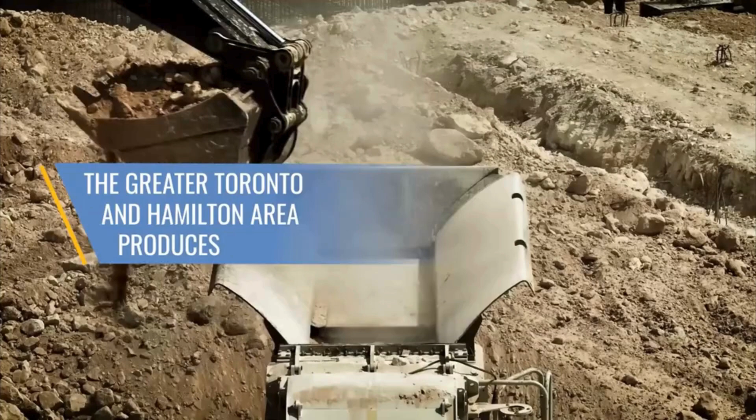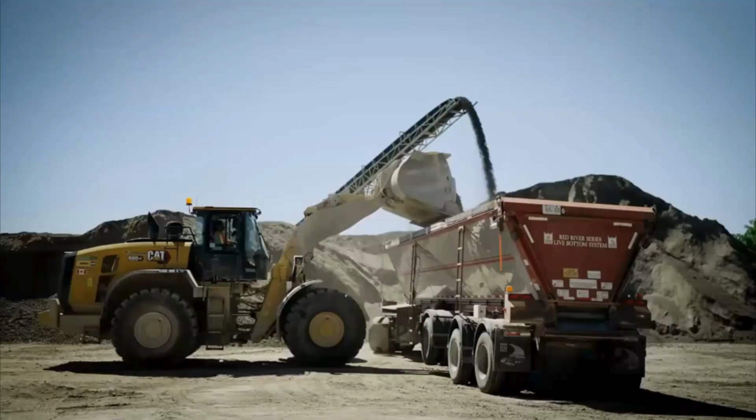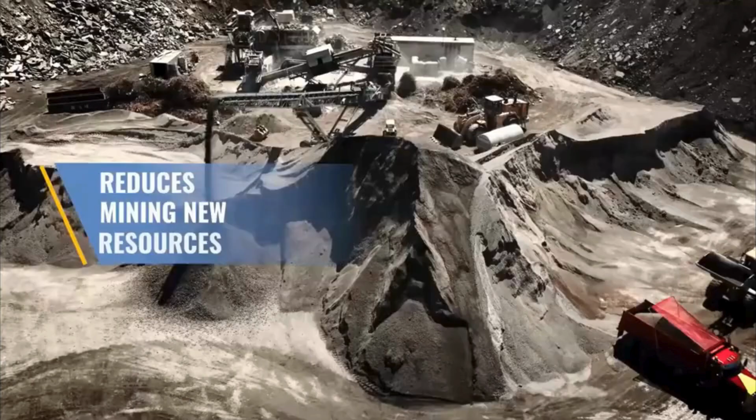Today's roads define tomorrow. For our communities to thrive, we need to build the infrastructure to support them. But as our cities grow, so does our impact on the environment. Every day brings us closer to exhausting our aggregate supply, the essential construction materials for the housing, transit, schools, and hospitals we rely on. The further we need to travel for or ship these materials, the more expensive it is to build, and the greater the environmental impact. But there is an alternative, a cost-effective, sustainable way. As we replace old roads and sidewalks, we can take the rubble to local recycling plants, where it is crushed, cleaned, and sorted to a standard provincial requirement, and repurposed to build new roads, subdivisions, highways, bridges, and tunnels. The same safe, engineered roads for our families to travel on, built sustainably with our children's future in mind. Every kilometer that uses recycled aggregates reduces the need to mine new resources, keeps valuable construction materials out of landfills, reduces carbon emissions and pollution, limits traffic congestion, and reduces the financial strain on municipal budgets. Countries around the globe, Toronto Pearson Airport, and our 400 series highways here at home have all used recycled aggregates in their expansion and new construction, demonstrating the durability, safety, and high performance of recycled crushed aggregates. And now, we're urging Ontario municipalities to adopt sustainable building practices and prioritize the use of recycled materials. With a recycling rate of just 20%, municipalities can make a positive change. This is clean air, less waste, and a future where growth doesn't come at the cost of our planet. The roads we take define us. Let's build a greener future we can all be proud of.

So with that, I'm going to dive a little bit more into the context here.

I think many of you might be aware that we are looking at continued population growth in Ontario and a growing state of good repair backlog, both of which require us to build more and maintain our existing transportation and housing infrastructure. We've also seen construction costs rise, especially during and after the pandemic, and as we deplete close to market sources of aggregates, those costs will only rise.

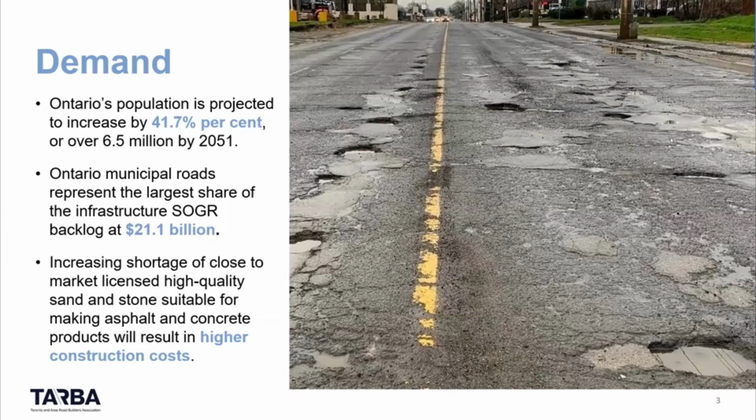And as roads are repaired, bridges are maintained, and other critical infrastructure is replaced or expanded, tens of millions of tons of asphalt and concrete are removed from construction sites across Ontario. And if they're not recycled and reused, these valuable materials will end up in landfills, further exacerbating our landfill capacity.

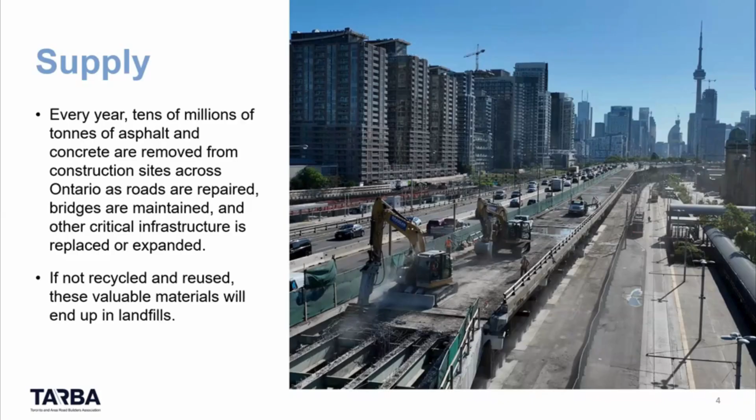So to start off with some definitions, and to dive into our discussion today, as you saw from the video, and as many of you probably know, asphalt and concrete are 100% recyclable and can be reused as valuable construction materials. So I do want to clarify, because we get this question a lot, as to what we mean by recycled crushed aggregates. So we have RAP, which is reclaimed asphalt pavement. We have RCM, which is the reclaimed concrete material. And the main topic of today, recycled crushed aggregates, is reclaimed asphalt pavement and/or concrete.

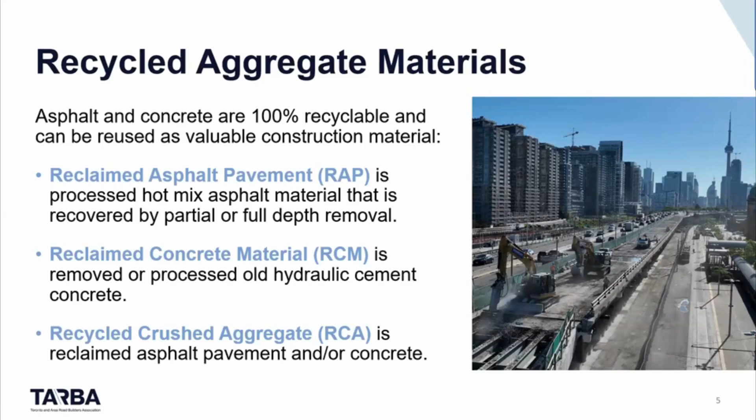In our view, RCA is a sustainable product that offers some of the greatest environmental benefits at a low cost. These materials have already met performance specifications when they were originally used, and when reclaimed, they undergo an additional rigorous process of crushing, screening, testing, and quality control to be repurposed for their intended application as construction material in new projects. Extensive testing in Ontario and internationally has shown that RCA is a high-performance material for an increasing number of applications, with numerous studies concluding that its geotechnical properties are equal and sometimes superior to primary aggregates.

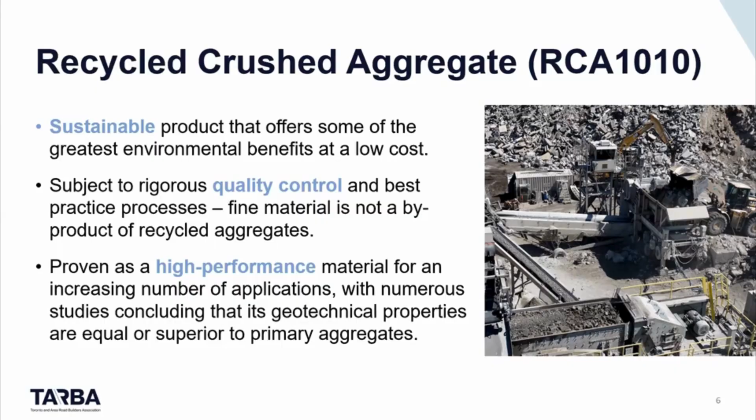And I look forward to Salman walking us through some of those results later today. In fact, when RCA conforms to Ontario specifications, or OPSS 1010, project owners can be confident that these materials will meet all performance requirements and quality expectations. As most of you know, the OPSS 1010 is administered jointly by the Ontario Ministry of Transportation and the Municipal Engineers Association, and also includes representatives from the construction industry.

So the spec as it is right now allows aggregate use in road bases, shoulders, and backfill to be composed of up to 100% recycled concrete and up to 30% recycled asphalt. And hot mix asphalt can also contain up to 30% RAP.

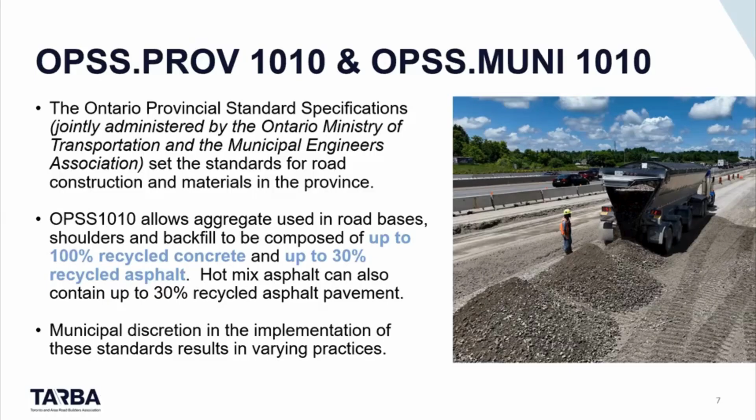However, despite this provincial standard, municipalities have discretion in their implementation and they can set their own standards. As a result, practices can vary widely by municipality, even in an economically significant region like the Greater Toronto Area, which is made up of 25 urban, suburban, and rural municipalities. For example, municipalities have specifications requiring primary aggregate only as part of their local specs or tenders,

So here's a good cheat sheet or an overview of the important direct and indirect economic and environmental benefits of using RCA. It significantly lowers carbon emissions, pollution, and project costs associated with long-haul trucking of the material while performing equally or better than primary aggregates. The shorter distance traveled also means less traffic congestion and wear and tear on roads, and RCA also preserves non-renewable resources and extends the life of existing pits and quarries. And how does it do all of that?

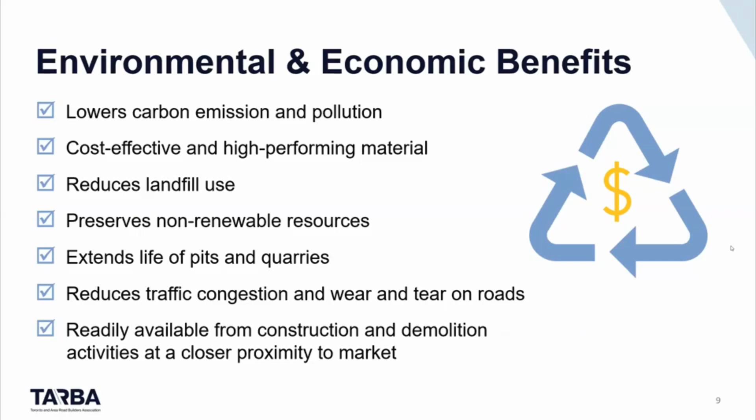So looking to the next slide, transportation makes up to 60% of the cost of aggregates. So that means that every extra kilometer that aggregate has to be trucked to a job site, it increases the overall building costs and carbon emissions. And RCA is available at a fraction of the distance to the new construction sites.

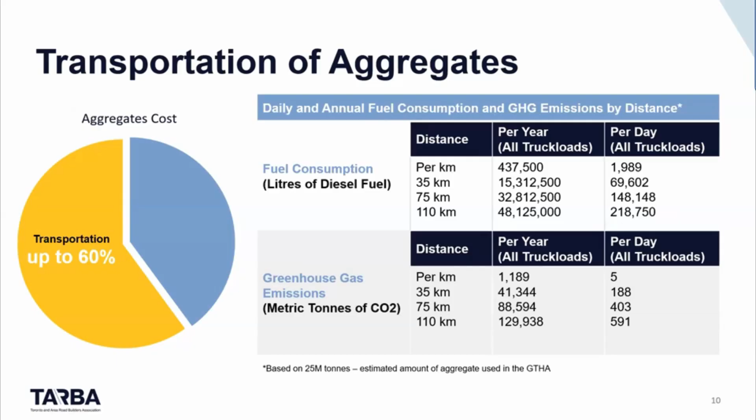The chart to the right, provided from research from EXP, estimates the fuel consumption and associated greenhouse gas emissions for the 25 million tons of aggregate produced in the GTA. As expected, longer distances traveled require more fuel and emit significantly more GHG emissions.

Now, as part of that research, 4 projects were examined, from a parking lot to a big box store distribution center in the Greater Toronto Area. The research found that the higher amount of RCA used on a project, the bigger the cost savings and carbon reductions. On average, across the 4 projects, the savings were about $8 per ton, and the carbon emission reductions between the primary and recycled aggregates were predominantly derived from the shorter distance traveled.

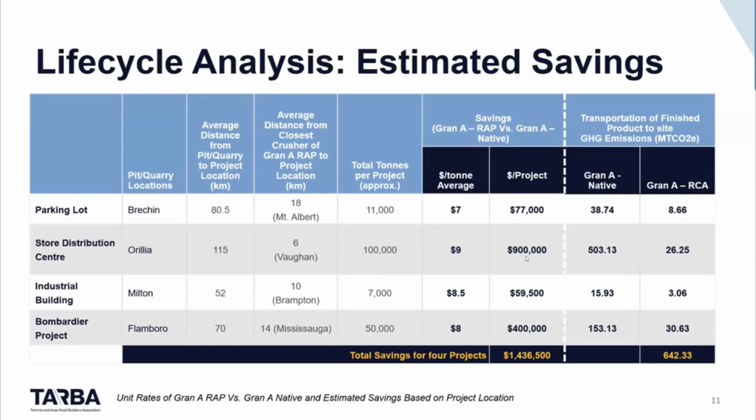So you'll see here on the chart, we have 18 kilometers versus 80, 6 versus 115, 10 versus 52, and 14 versus 70. And you'll see that the more aggregate that is used on a project, the higher the savings. So for 11,000 tons, you have 77,000 in savings versus 100,000 tons, which is almost $1 million in cost savings.

Next, I want to share with you 4 examples of RCA use in Ontario. The first is the Ontario Ministry of Transportation, who has used RCA in the expansion and maintenance of its extensive 400 series highway network dating back to the 1970s. On this particular expansion of a 9-kilometer highway stretch, MTO used 300,000 tons of RCA, generating $1.2 million in cost savings for taxpayers. The RCA source was less than 10 kilometers to the project, generating significant carbon reduction emissions.

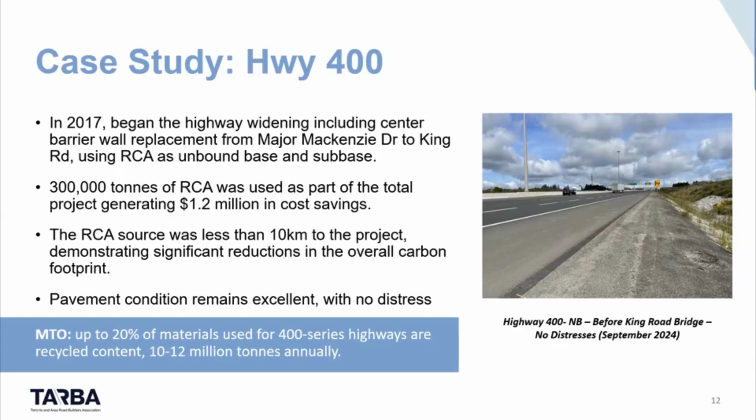Second to that, and on our topic of performance, back in 2006, Toronto Pearson Airport set the example for material reuse, recycling, and remediation with the demolition of Old Terminal 1, which at that time was Canada's largest demolition contract. 250,000 tons of rubble was crushed, screened, and recycled on site to be used as the apron subbase holding up the final apron structure. Since the process took place on site, it significantly reduced carbon emissions from long-haul trucking. In 2022, Pearson reused another 25,000 tons for the rehabilitation of its second busiest runway, once again showing no structural failures or additional maintenance requirements.

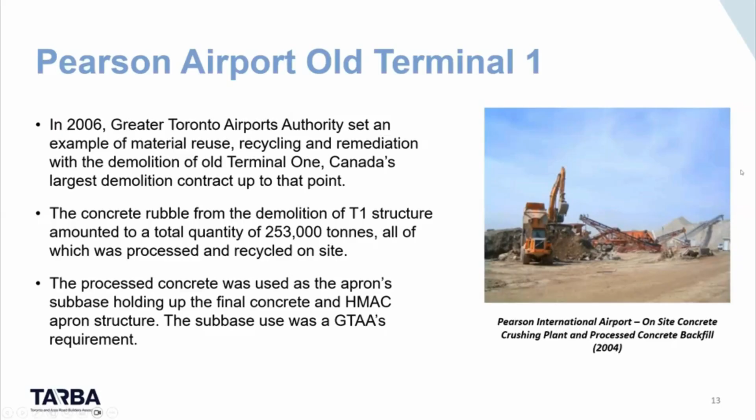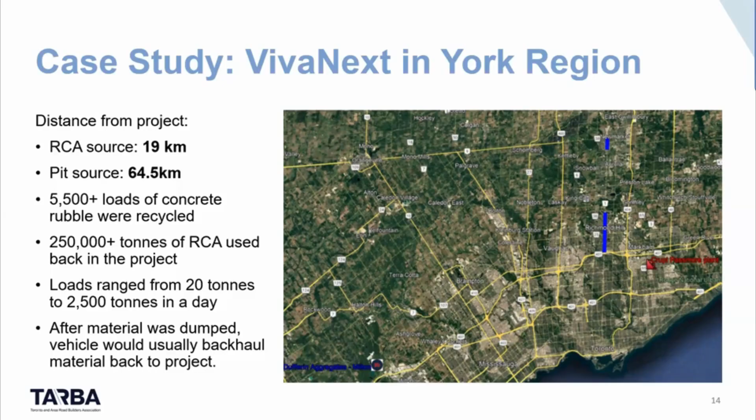So an additional benefit I'd like to highlight here is that after the rubble was dumped, the vehicle would backhaul material back to the project, minimizing empty loads as part of the project operations.

Six years later, after many good Canadian winters, York Region is very happy with the performance, reporting no structural issues or additional maintenance required. You can watch that full webinar on our YouTube at Road Builders.

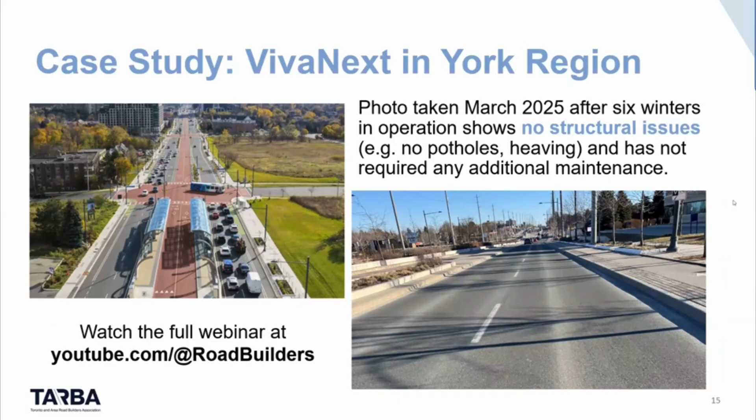The last project I want to share is one from East Gwillimbury, north of Toronto, with a population of just over 35,000 people. Through its Thinking Green standard, it requires 30% of recycled materials to be used. In 2021, their Queensville subdivision used approximately 88% recycled material, generating $152,000 in savings for the project. I included this example because it's a small municipality, showing that these can still tap into the benefits through thoughtful policy direction and by using the OPSS guidelines.

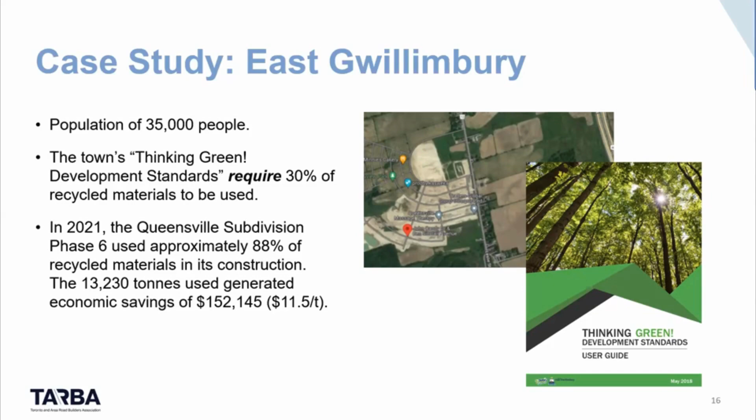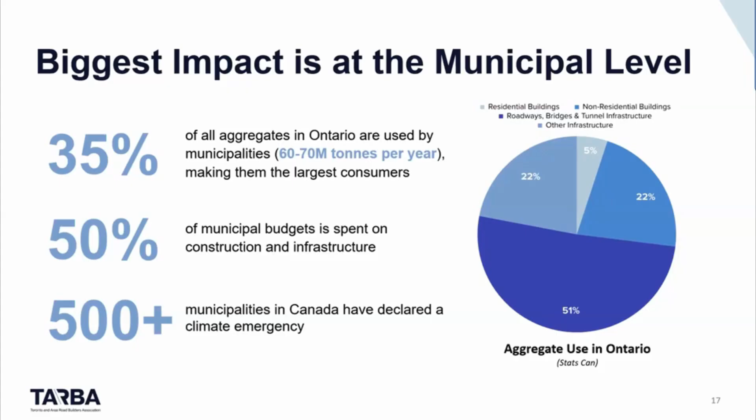You saw that the video largely focuses on municipalities. So why municipalities? The short answer is that's where the biggest impact for RCA's economic and environmental savings can be seen. In Ontario, just over 50% of all aggregates are used in the construction of roadways, bridges, and tunnel infrastructure, and all of those can be built with RCA. Municipalities own and manage more roads than the provincial and federal governments combined, and they are the largest consumer of aggregates, using 60 to 70 million tons per year, with 50% of their budgets allocated to construction and infrastructure. All of this in the context that more than 500 municipalities in Canada have declared a climate emergency, and even more have net zero targets they're hoping to accomplish.

From a municipal and provincial perspective, RCA is also the solution to two big land use issues at the local level: reducing construction waste in our landfills and extending the life of existing pits and quarries. If you live in a municipality close to one of those, or work in policy development, you've seen that it generates a lot of resistance and is quite a contentious issue for local communities.

Ontario has less than 10 years until all landfills in the province are full, according to a live countdown run by Waste to Resource Ontario. At the same time, aggregates are the foundational material for the critical infrastructure our growing communities need. Even in a resource-rich area like the Greater Toronto Area, we already have an aggregate deficit. The region produces 25 million tons but consumes 73 million tons, projected to rise to 1.5 billion by 2041, all while exhausting close-to-market sources. As I mentioned, the further we need to travel for our aggregates, the higher the cost of construction and our impact on the environment.

Sharing the top line stats you saw in the video: if municipalities across Ontario adopted a recycling rate of just 20%, it would avoid extracting up to 33 million tons of new aggregate per year across the province. This would result in annual savings of 264 million dollars and greenhouse gas emissions equivalent to taking 15 million gas cars off the road for an entire year. In case you're wondering, that's a lot more than all the cars we have here in Ontario.

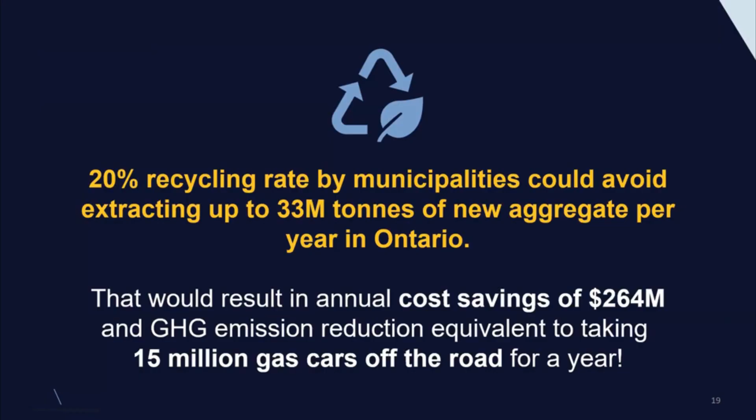20% was selected as an achievable target, demonstrated for decades by the Ontario Ministry of Transportation, proving the cost and sustainability benefits while maintaining performance. As you'll see throughout the remainder of this presentation, the key aspect in using RCA successfully is quality control, as with any other material. As mentioned at the beginning, research has shown that when RCA conforms to OPSS 1010, project owners and contractors can be confident that these materials will meet all performance requirements and quality expectations.

This is why we very strongly encourage that all efforts should be directed to enforcing quality rather than restricting the use of the material. On the website rcaontario.ca, you'll find the TARBA quality control plan, which provides a technically sound manual for the production, utilization, and ensuring the quality of recycled crushed aggregates. This can be used as a great resource for producers, contractors, and project owners.

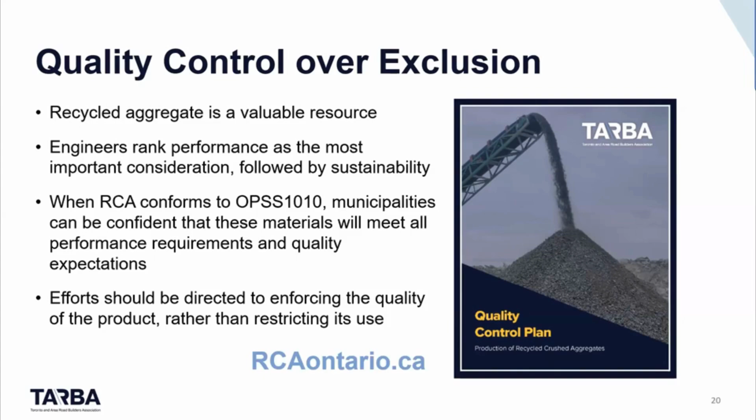The last slide I'll leave you with, before I hand it over to Salman, is that in our view, both public and private project owners can unlock the benefits of RCA by prioritizing sustainability as part of the initial project design. More specifically and tangibly, as action items, the first and foremost would be including RCA use as part of the tenders. In some cases, we've seen that even if a municipality has specifications that allow the use of RCA, once tenders come out, they still specify primary aggregates only.

So it's really important to include RCA use as part of the tenders in order to be able to tap into those project cost savings as part of the initial bids.

Align municipal standards with the OPSS 1010. Having a smorgasbord of different standards, municipality to municipality, actually erodes the consistency and performance. It increases administrative burden and discourages wider adoption. So aligning those municipal standards and capitalizing on economies of scale as part of the production of the material will only benefit project owners, contractors, and suppliers.

And lastly, collaborate with industry. The projects that I've shared have been great public-private partnerships with the builders, and that's really to tap into the internal capacity and confidence of quality control measures and ensure that the applications are appropriate.

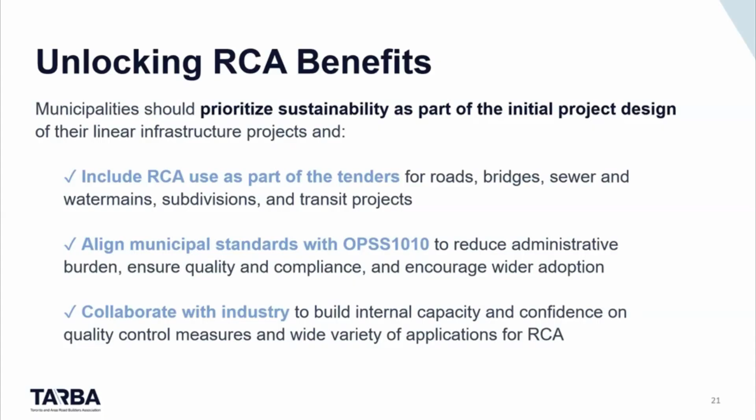and the material is used to its greatest abilities. On the same website that I mentioned already, rcaontario.ca, you'll find additional resources, including the EXP research, the research by Engtec that Salman is going to talk to shortly, as well as the VivaNext case study and other webinar presentations on the topic.

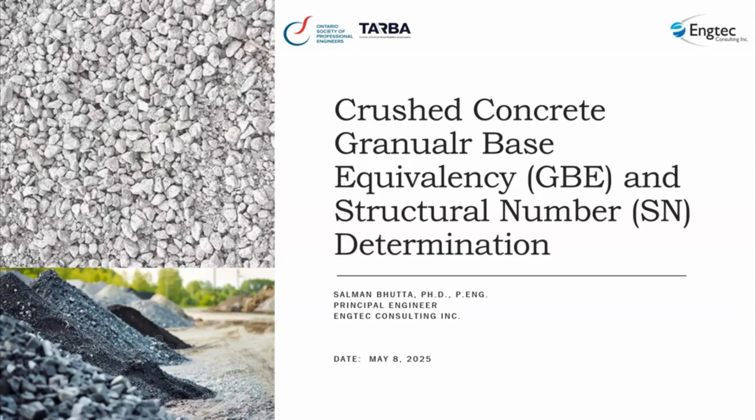This is a bit of a technical background to it. I'm going to talk about some numbers, but in the end it's all going to gel into one formal conclusion, which will give answers to the questions in our mind: Is crushed concrete good or is crushed concrete bad? Is it structurally sound or is it structurally not sound?

With that in mind, I took the liberty of setting up this presentation where I'm going to talk about the background as to why we are doing this. We're going to talk about assessing the granular base equivalency and structural number of crushed concrete - how did we assess it, how did we test it. We're going to compare it with materials which we deal with as a standard in the industry: virgin granular A's, granular B type 1s and type 2s, and crusher run limestone type material, which we are very familiar with. Then I'm going to wrap it up with conclusions and recommendations as to what we found out of this study and how we can utilize it in pavement designs and replacement of one material with the other.

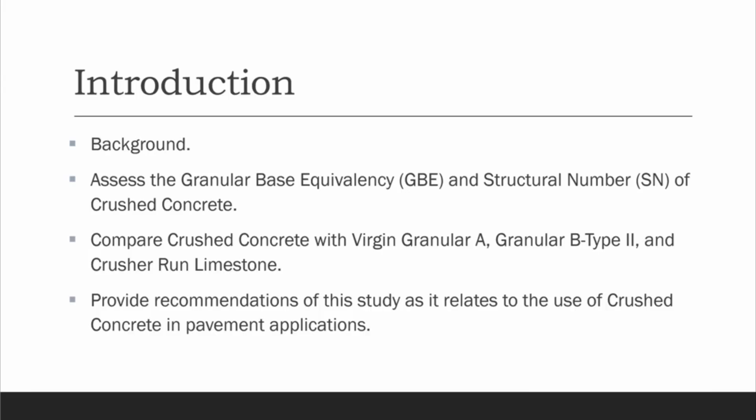So just to go through a background, the use of recycled materials, namely crushed concrete, is gaining quite a bit of momentum in the industry. About 20 to 25 years ago, in the early 2000s, it was a question mark element, but now it is widely used in municipal, private, and provincial projects all the time. Recycled materials reduce the demand for virgin aggregates, minimize waste, and contribute to sustainable construction practices.

However, a critical aspect of this adoption is the need to ensure that the structural integrity and performance of the materials, namely crushed concrete, is comparable to traditional materials like virgin granular materials, crushed limestone, or sand and gravel materials, which we've been using forever in the industry and have a long history. Keep in mind, crushed concrete has over 25 years of history also at this point from a technical perspective.

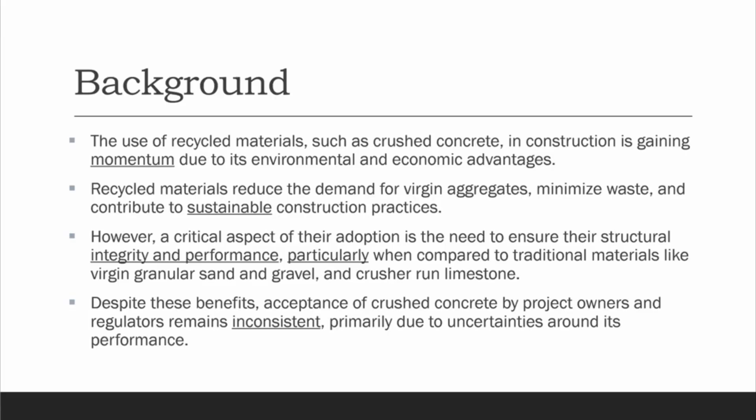Despite these benefits, acceptance of crushed concrete by project owners still remains inconsistent. You see a lot of times projects allow you to use it, but then when it comes down to proposals implementing it, the product is refused. I've been involved with projects where it was refused. There are certain uncertainties around its performance - some of them are true, some are not. Some are based upon earlier crushed concretes from the early 2000s, which had bits of issues here and there, but things have improved significantly since then. This study offers a thorough evaluation of structural numbers.

Those of us who design pavements are aware of structural numbers and how we calculate them. Granular base equivalency is a concept from the 1990s and earlier, comparing crushed concrete performance to standard materials, which is virgin materials for that matter.

What TARBA has noted is inconsistencies in how the structural strength of crushed concrete has been assessed over the past two decades. In some regions, crushed concrete layer thicknesses are arbitrarily increased 10 to 15% thicker. Say if you're going to put 150 millimeters of granular A virgin, if you want to use crushed concrete, we need 15% or 20% more, whatever the criteria. So it's a very randomized selection of acceptance of this material, as opposed to crusher run limestone or 50 millimeter crusher run limestone for that matter.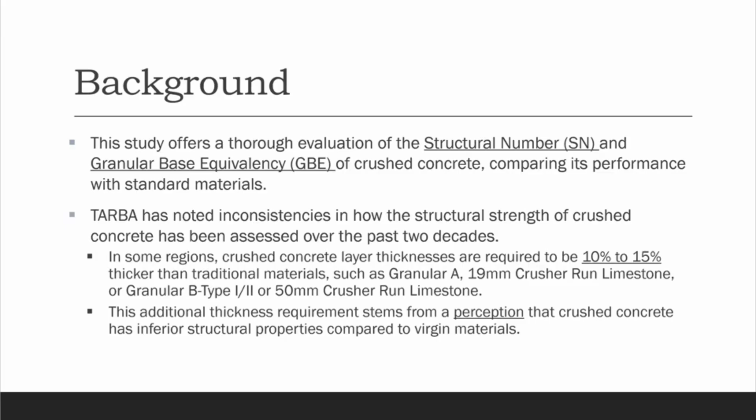This additional thickness requirement stems from a perception that crushed concrete is an inferior product, and consequently it is not comparable to virgin materials. So hence this study, to try to figure out: is it structurally inferior or not?

This study seeks to challenge that perception and provide data that supports the equivalency of these materials. The tests are intended to demonstrate that crushed concrete can perform as well as traditional materials without the need for any increased thicknesses, and we will discuss some testing here also.

How to go about getting them approved. Furthermore, this is recognized by the Ministry of Transportation Ontario, because in most of their projects they consider it an equivalent, although MTO has a granular B type 1 equivalency. They do not allow it to be used as a granular B type 2 material, and that's something we'll discuss toward the end, mostly based on early 2000s assessments that were done, and the materials in those days were a little bit different in terms of quality also.

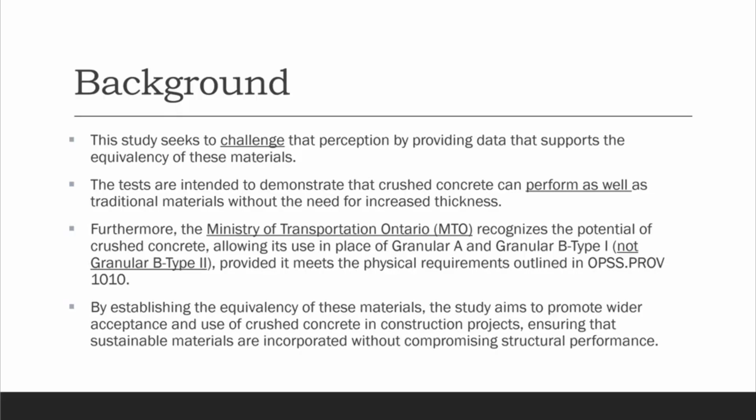By establishing the equivalency of these materials, this study aims to promote wider acceptance and use of crushed concrete in construction projects. The main objective is to ensure that sustainable materials are incorporated, as Raleigh indicated, without compromising structural performance of pavements and linear infrastructure.

So now I'm going to jump into that study. Last year we were in conversation with Tarba, and they required some complex testing to prove this. Essentially we're talking resilient modulus type tests, which are not very common and mostly done by university type entities. We are lucky at Engtec that we have the infrastructure, equipment, and expertise to do those tests.

So we set up a program whereby we picked three different types of crushed concrete supplier samples: 19 millimeter crushed concrete and 50 millimeter crushed concrete. There are suppliers, but I just call them A, B, and C to keep that confidential. Their materials are different in look and in terms of some physical properties also, which I'll detail in the upcoming slides, but there were three different suppliers tested.

Can we test 10 different suppliers? Yes, we can, but right now we tested three suppliers, and they are major suppliers in the GTA area. Then we tested crushed limestone. This is fairly standard, coming out of the Milton quarry or Lafarge Dundas, and it's a fairly high-end product with a very high cost, 19 millimeter and 50 millimeter products in that case. Essentially the 50 millimeter crushed limestone is like a granular B type 2 material.

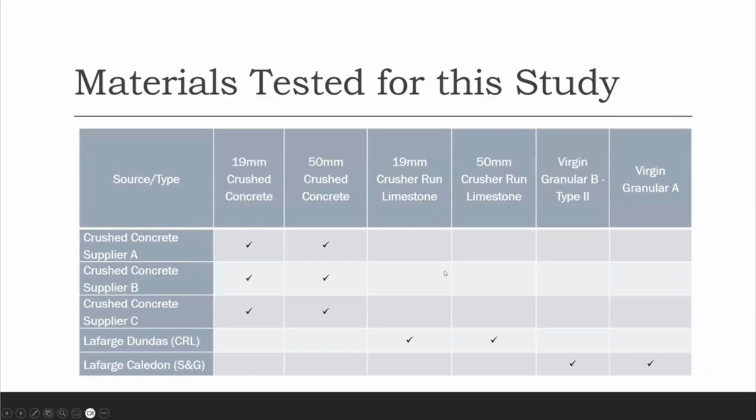And then we went to a sand and gravel source. So we went to a virgin granular A, 60% crushed, virgin granular B type 1. It says type 1, and it says type 2 here, but essentially it kind of falls in the type 2 category because of its crush count. But it is from a Lafarge Caledon sand and gravel quarry pit.

So something about testing standards. We tested everything in this material matrix for OPSS 1010, physicals, gradations, everything under the sun. We had tested it completely.

And then we went in and did, as per AASHTO T307, something called resilient modulus testing. This testing is for granular and soil materials. I'll show some pictures for this particular test as we move along, and give you the background for it also. It's like under dynamic loading, looking at how recoverable strains and applied loads are managed by the materials in question. So it gives you a strength indicator, the item that plugs into structural numbers and granular base equivalencies for that matter.

So from a testing methodology and engineering analysis perspective, we determined the resilient modulus of each material. We evaluated the granular base equivalency of each material, because some of us still go back to granular base equivalencies for municipal jobs and private entities, and we still do that because it's a concept that's been around for 40 to 50 years. And then we went ahead and did the structural number assessment.

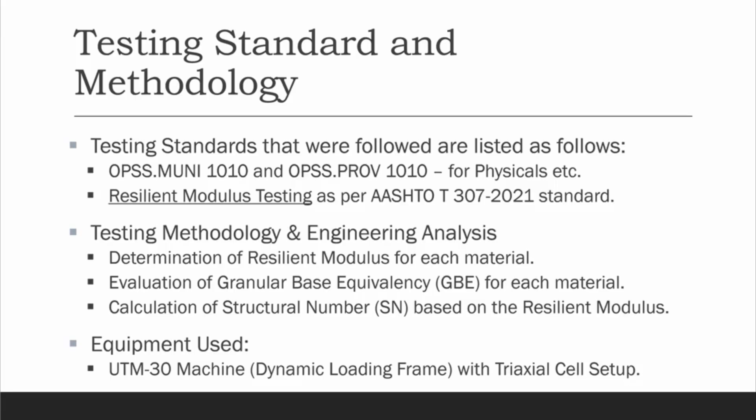Based upon resilient modulus analysis, the equipment we used for this is called a UTM-30 machine, manufactured by Controls out of Italy. It's a dynamic loading frame, and we need a triaxial cell setup. For those of us aware of material testing, it's like a pressurized chamber that you can create all sorts of confining pressures in.

Some references: adaptation of AASHTO pavement design guide for Ontario conditions, MI 183, which provides guidelines as to what values should be used for structural design purposes. Pavement design and rehabilitation manual SDO-90 primarily deals with granular base equivalencies related elements, and the second edition, 2013, deals with structural number. And then there's AASHTO T 307, the standard method of test for determining resilient modulus of soils and aggregate materials.

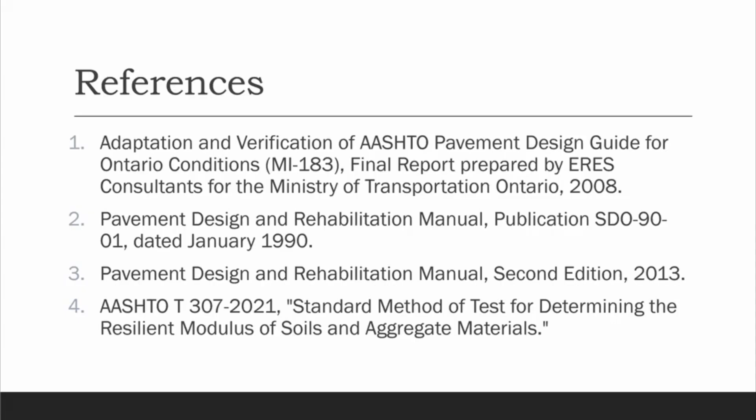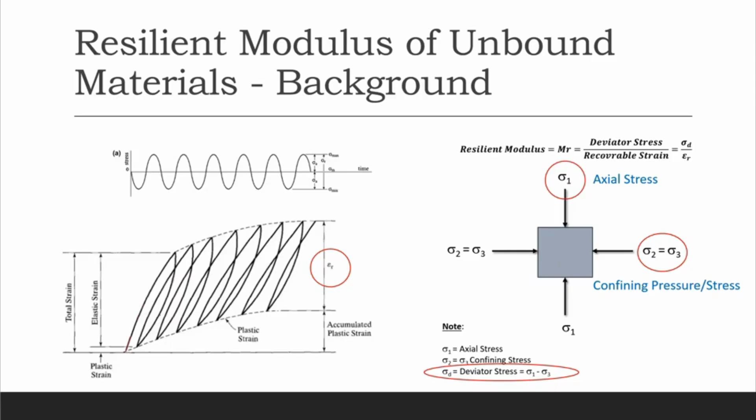So in a triaxial cell, imagine a piece of gravel somewhere in a cubic centimeter of material, in the middle of gravel, with a confining pressure around it. Every time a vehicle goes by, a load gets applied to it, and that's exactly what is being simulated in this type of mathematical analogy. So there's the applied load, the confining pressure, and then you can calculate the resilient modulus if you determine the recoverable strain and know these applied values, which equipment nowadays can easily measure. You can assess the resilient modulus of the material and determine with quite a bit of accuracy what this material is from a strength perspective.

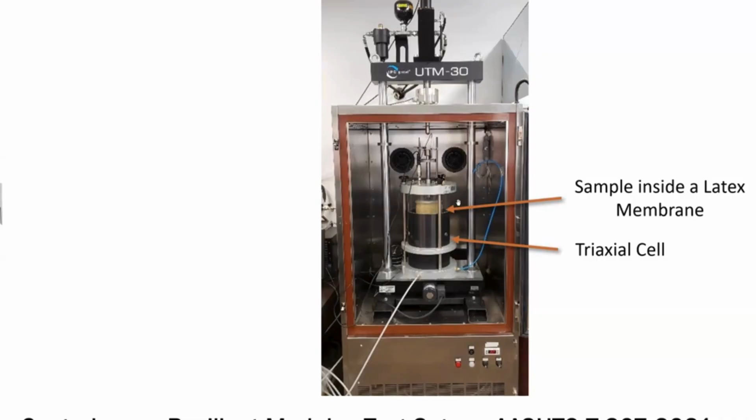It's a pretty standard way of doing things in testing in the dynamic mode, using the loading frame for soils and granulars. This is the setup used to do the testing as per AASHTO T 307. We are measuring recoverable strains, and also measuring the stresses and strains. All these things are logged into a data acquisition system, and then we go about doing a calculation to figure out what these values are.

Big question here is what kind of confining pressure should you be using?

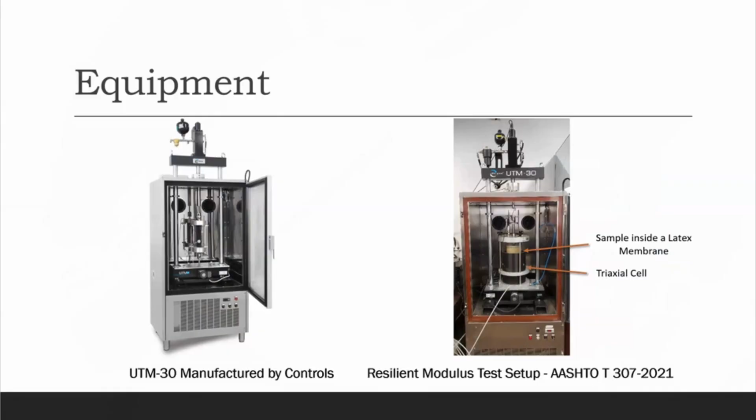Now, we can't just randomly pick numbers as to what we should be doing. You have to do some mathematical background and calculations to figure out what confining pressures to use. So you need to set up this model, a typical 100 millimeters over 150 of A over 300 of B pavement, and figure out the confining stress in the lateral directions due to a standard applied load.

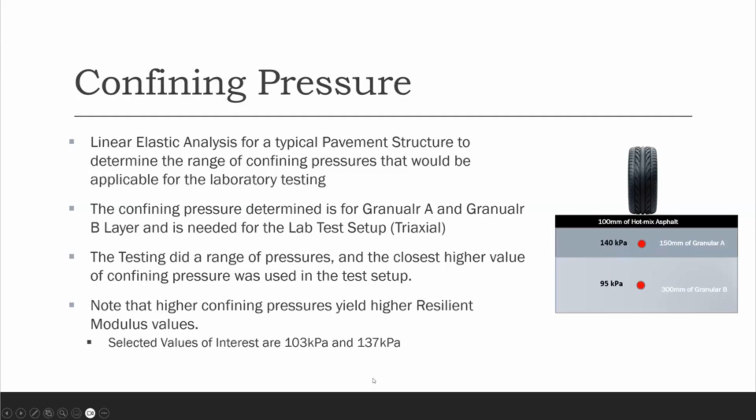When we evaluated that using linear elastic analysis, we figured out that at this depth, the confining pressure reduces to 95 kPa, and within the granular A layer it is about 140 kPa. So we need to pick the closest numbers for confining pressure that we can apply. The selected values of interest are 103 kPa and 137 kPa, which are very close to these values. If you want to evaluate granular B, you're somewhere around 103 kPa, lower down into the pavement structure. If you're at granular A level, your confining pressures are a little higher, about 137 kPa.

So with that in mind, now that we've got the engineering behind these tests out of the way, let's talk about standard OPSS testing.

All these materials were tested for physical properties before we began the resilient modulus testing. This is a matrix showing results for physical properties as outlined in OPSS 1010 for crushed concrete, crusher run limestones, and virgin materials. As you can see, even the material coming out of Lafarge Caledon is about 95% crushed granular A, when the typical requirement is about 60. Not terribly low, but a pretty decent coarse aggregate micro-Deval value for coarse and fine aggregates.

Keep in mind, if it's a weak material, this is where it will show up. Some of you might be thinking, is it a weak material, is it comparable? That's where typically its inter-material characteristics come into play, which is the micro-Deval. It's a fairly abusive test to aggregates.

Looking at asphalt coated particles, we had approximately 17 to 18% asphalt coated particles in the materials. Some level of contamination is present, like wood chips, brick pieces, stuff like that. Crushed concrete has it, but it's always less than 1% in most cases. Plasticity was determined - they're all non-plastic. Sieve analysis - all of them passed the table 2 requirements.

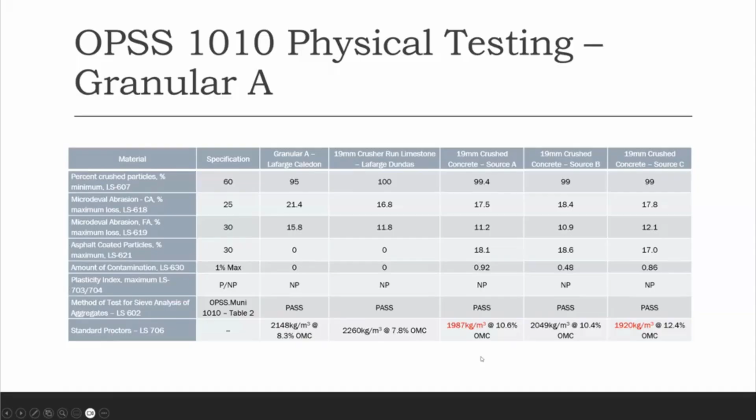Now, is that number bad? We'll find out it's not really that bad, but it does indicate somewhat lower strength.

Going down to OPSS 1010 granular B materials, we tested them all. They're all above 85% crushed, and looking at it, there's still some level of contamination. There's a little bit more on the micro-Deval for the coarse aggregate, but again the materials are all pretty good - from a physical properties perspective, gradation perspective, they're non-plastic, and have a good, decent proctor number.

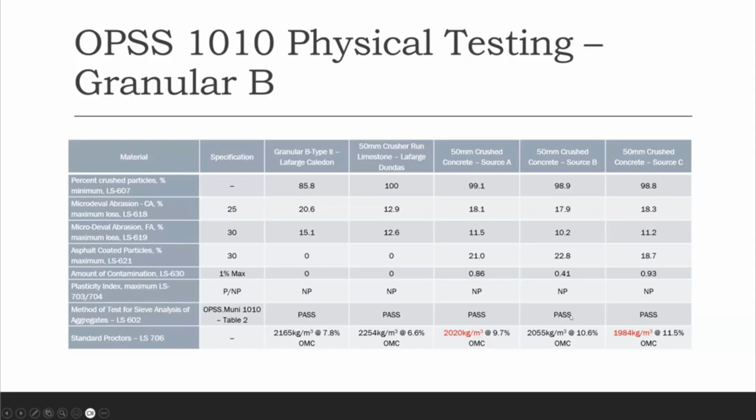This is typically what we have in the field when we're doing it, between 1900 to 2000 as a proctor, but there is a material from source B which was at 2055 for the proctor. So these numbers do reflect - I would expect this particular material to have a higher resilient modulus. That's what I wanted to say.

Based upon that, what we did is now that we tested it with that equipment as I explained, we determined the resilient modulus - virgin granular from Lafarge Caledon is 283 MPa. For those of us who have to use a number from a design perspective, or are running AASHTO MEPDG and have to enter a number, we typically say 275 MPa is the number we use, between 250 to 275, with 275 on the upper end. This is the resilient modulus for it.

Virgin granular B type 1 - I'm calling it type 1, but it's really pretty close to getting to type 2. It has about 90% crush count, but it's type 1 in essence.

And you see it has a fairly low level of value. 220 is what we typically use for AASHTO MEPDG for design purposes, or pavement design purposes. This is for 19 millimeter crusher on crushed concrete.

This is the average of sources A, B, and C. There are three sources, we have about 287. It's very comparable to the Lafarge Caledon number. And for 50 millimeter crushed concrete on average, it's a little bit higher than the Lafarge Caledon number.

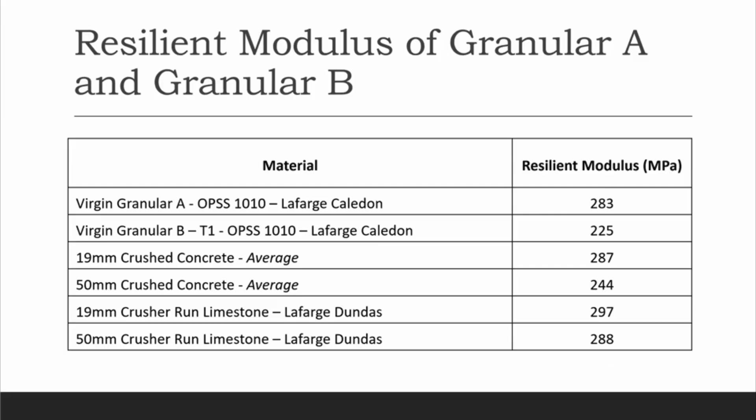Now, when you come down to 19 millimeter crusher run limestones and 50 millimeter crusher run limestones, you would expect these numbers to be higher, and they are higher, but not terribly high. They're within about 30 to 40 MPa higher. These kind of fall in line with what we generally perceive and feel these materials are to be present in these values in terms of strength.

Going down and breaking down these numbers from a crushed concrete perspective, you remember I had pointed out some red values earlier. Those are those two numbers. So you can see the one which had the higher Proctor had the higher resilient modulus also over here.

When you do this test, you will get these values at different confining pressures you run it at. So you have to pick the exact number. If you go and pick a higher confining pressure number, your resilient modulus will be through the roof, so it may not be representative. You need to do some math prior to picking these numbers as to which one is really applicable.

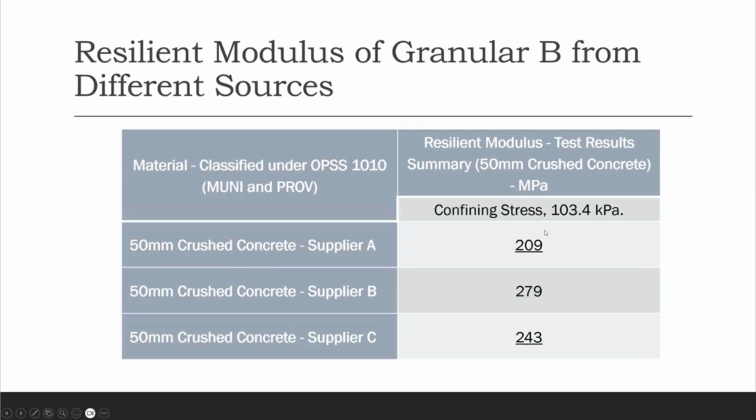To our industry, this is granular B, or 50 millimeter crushed concrete from supplier A. You see the ones which had a little bit lower value, and the one which had a higher Proctor value is at around 279. So what we have to do is, since we can be changing these materials,

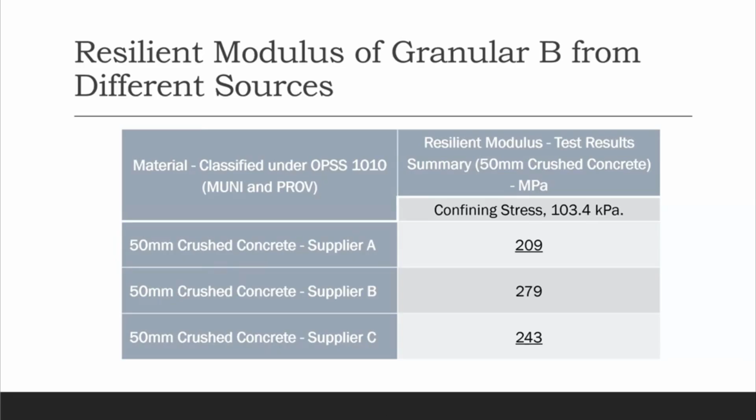we have to kind of use an average number. So in this case, we had a sample set of 3, and therefore we are using the average value for that. So this kind of shows a graphical representation of what we got in the field.

So if you are assuming that your granular B is about 220 MPa on average, or 225 for virgin material, you are pretty close to this. Some are higher, some are lower.

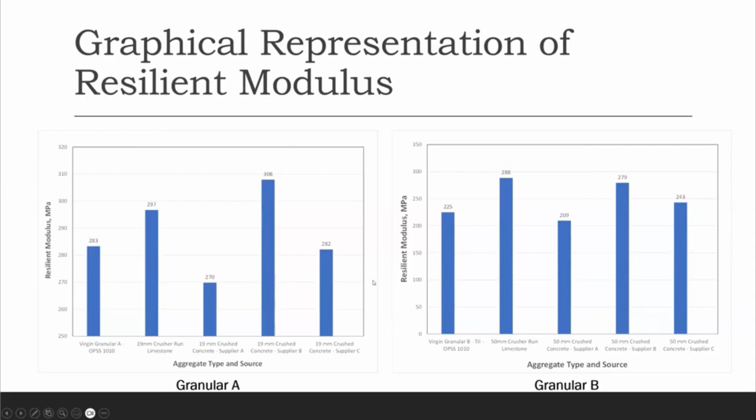Crusher run limestone is obviously quite high. And for granular A, if you're looking at something which is around 275, all these materials are pretty good in terms of their values as assessed from lab testing.

Now we move on to granular base equivalency. This is the standard method to determine granular base equivalency. So all you have to do is H1 is conventional granular A, the reference material that you're using, which is sand and gravel based granular A, and this is the resilient modulus of that material.

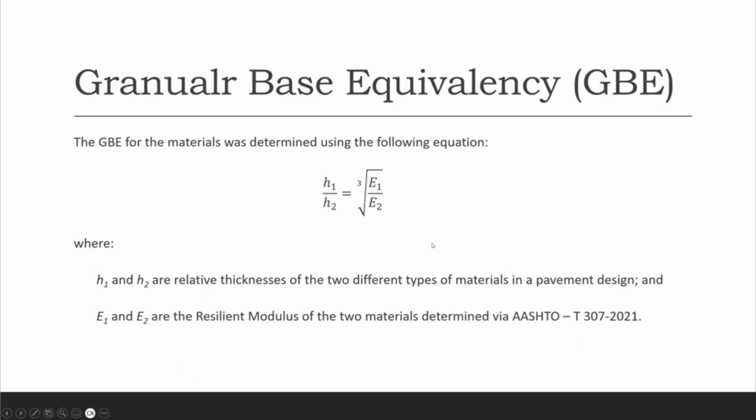And this is the material for which you want to determine the GBE, and this is the modulus of that GBE. All you have to do is solve this equation and you'll get your granular base equivalency. And this is what you get.

You get the virgin granular A is around 1.0. 19 millimeter crushed concrete on average is equal to 1.0. This is based upon factual data as tested and then assessed from a GBE perspective. And this is granular base equivalency.

19 millimeter crusher and limestone is also approximately in the same way, because you have to keep in mind, it's a cube root, so it kind of removes a lot of this variability in the materials when you do the mathematics to calculate that value.

Virgin granular B is 0.67, and the crushed concrete 50 millimeters is 1.0 again, and crusher run limestone is about 0.9. It didn't turn out higher because the cube root reduces the variability, it minimizes the error. So this is what we get from a GBE perspective. Now keep in mind, this is factual test-based results.

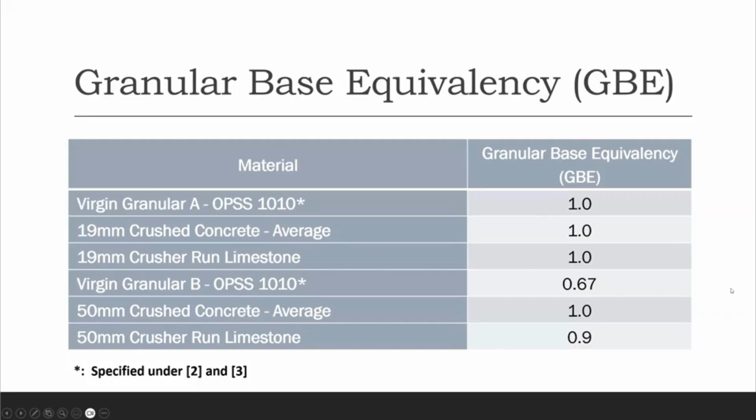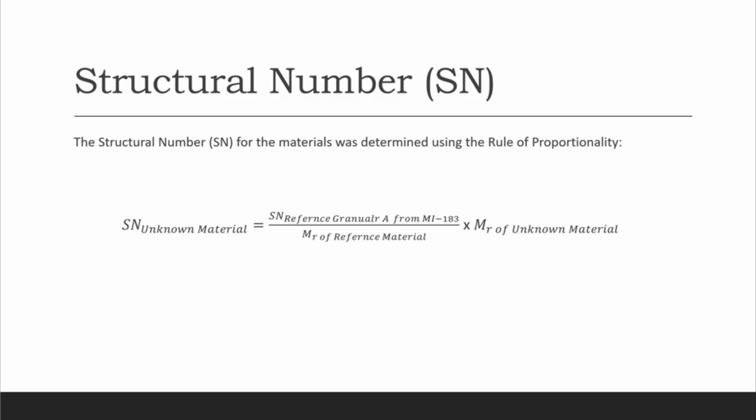So in order to do a structure number, now you can't do the cube root analysis, so you have to almost do a rule of proportionality. So you want to know the structure number of an unknown material, you take the structure number of that reference material from 183, get the MR for the reference material from the table outlined before, and use this formula to calculate. Once you do that, this is what you get.

Virgin granular A is 0.14. Virgin granular B, type 2 is 0.14, not type 1. Type 1 is 0.09. 19 millimeter crushed concrete on average was 0.14.

50 millimeter crushed concrete on average was 0.15, so it's a little bit better than what we were expecting. 19 millimeter crusher run limestone and 50 millimeter crusher run limestone are pretty much equivalent or better than 50 millimeter crushed concrete for that matter.

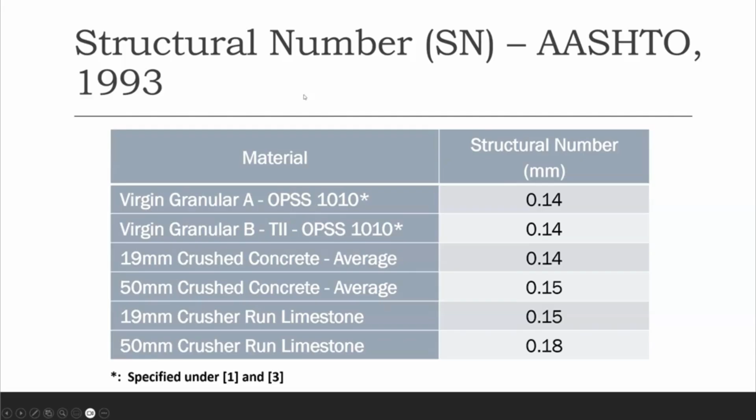We have evaluated these numbers based upon lab testing, which is established, as well as mathematics, which is established in this procedure. Now, you'll notice I keep saying granular B type 2. If you go back to the original comment in one of the slides, MTO does not allow us to use it that way—they only classify crushed concrete to be replaced as granular B type 1. The same thing exists in OPSS municipal and OPSS provincial, and we'll talk about that.

From a granular base equivalency perspective, crushed concrete is equivalent to virgin granular A and virgin granular B type 2 materials. We're not really worried about whether it's type 1 or type 2 or what the specs allow—we're looking at materials and comparing them one by one. It exhibits comparable performance in terms of load-bearing support in pavement structures.

This is based upon actual factual data as presented by Raleigh earlier, and performance of this material in the field. GBE results indicate that crushed concrete can be used in similar thicknesses to virgin granular B type 2 and granular A. In our assessment, there is no compromise to the structural integrity of the pavement when using crushed concrete.

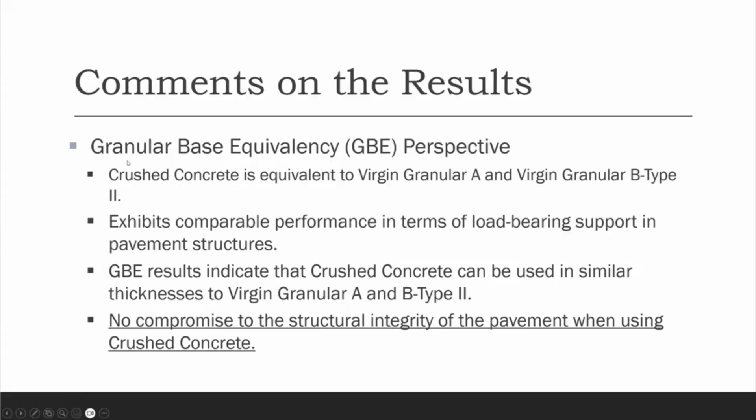From a structural numbers perspective, 19 millimeter crushed concrete is equivalent to granular A. It can be used as a direct substitute for granular A in pavement designs, offering similar load distribution and resilience under load conditions. 50 millimeter crushed concrete performs slightly better—because this is equivalency, not cube root analysis—and performs slightly better than granular B type 2.

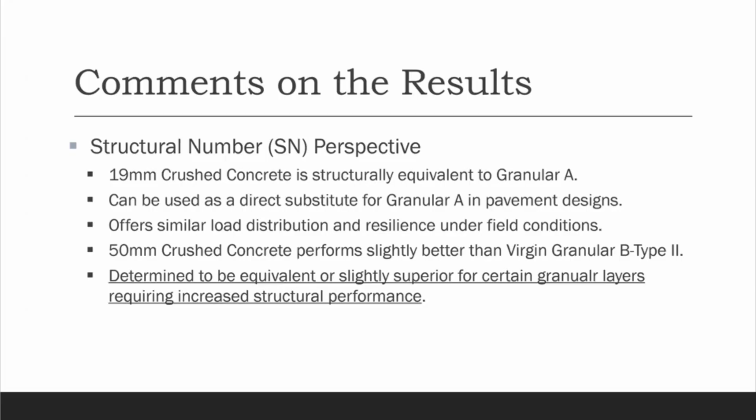It is determined to be equivalent or slightly superior for certain granular value layers requiring increased structural performance. So in conclusion, granular-based crushed concrete is equivalent to virgin granular A and granular B type 2. Now I will explain why.

Back in the late 1990s and early 2000s, there was a discussion about why crushed concrete at the MTO level was not used as granular B type 2. Why couldn't we use it? There were discussions based upon the quality of the material in those days, regarding granular B type 2's drainage capabilities and load-bearing capabilities. Not a significant amount of testing was done, but based on what was said in the industry, it was decided not to allow it as granular B type 2.

Keep in mind, it's perfectly okay to use it as granular A, but how come we suddenly decided not to allow it as granular B type 2, yet we're okay using it as granular B type 1? Over the last 25 years, there has been significant improvement in the materials, their quality, and their QC controls—what is actually in the material.

Definitely what you don't want is material with soil contamination. That falls under the contractor's or supplier's purview as to how they manage it at their end. But it would become quite obvious, especially based on permeability and structural capability, if there is a contaminant in the system.

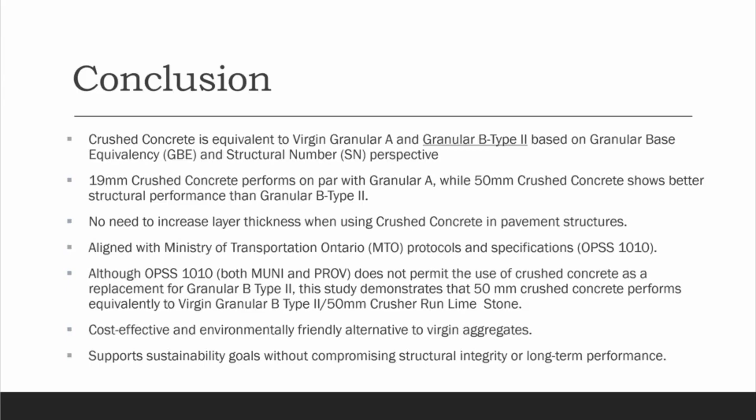So maybe the specifications need to be looked at again from the OPSS perspective. It's a fairly cost-effective and environmentally friendly alternative to virgin aggregates, and that links into what Riley was indicating earlier, supporting sustainability goals without compromising structural integrity and long-term performance. There's significant evidence to that fact.

And with that, thank you very much. If there are any questions, I think they're going to come through OSPE at this point, but I'm willing to answer any. I hope this brief synopsis of how we got around to figuring out these values and numbers, which we always talk about hypothetically, helps. Now we have some data that proves where things lie in the global matrix of things.